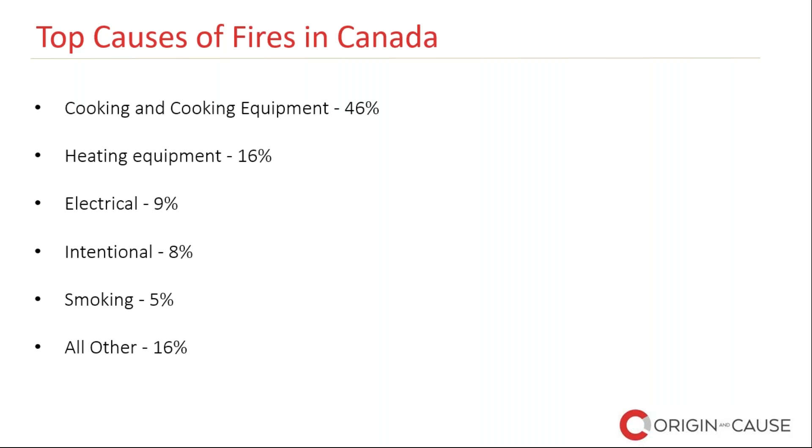Heating, throughout most of the country, is required most of the year. I'd say probably 7 to 8 months of the year we're requiring some sort of heating equipment, and the heating equipment is not confined to just heating the home. It's also heating water. There's a number of commercial applications that run into that. So yeah, it's 16% of the fires in Canada.

So the most common cause of heating equipment fires: very few heating equipment fires are due to malfunctions. Now, certain manufacturers have certain difficulties or challenges with some of their equipment, and they do malfunction. I'm not saying that they don't, but the majority of the ones that I have been involved with tend to deal with maintenance issues.

And when I talk about maintenance issues, I'm talking about regular cleaning and general maintenance. There are some service issues that come into that, but normally, maintaining the equipment would probably mitigate a lot of these fires.

Clearance to combustible issues normally involves either the installation of the equipment, or once the equipment has been installed, the user of the equipment putting combustibles too close to the equipment or the venting, which causes some of the fires. Venting of cracked vents and blocked vents normally has to do with carbon monoxide incidents, or incidents where the venting is too close to combustibles and you get cracked or blocked vents.

When you have a blocked vent, you can have the flames coming out the bottom, and we'll go into that a little bit later. The flame exits the bottom of the equipment and ignites any combustibles that would have been in the area around the equipment. So it's not just carbon monoxide incidents. It does have to do with the actual fire escaping the heat exchanger of the equipment and igniting combustibles. So almost all heating equipment fires are preventable if proper maintenance or installation procedures are followed.

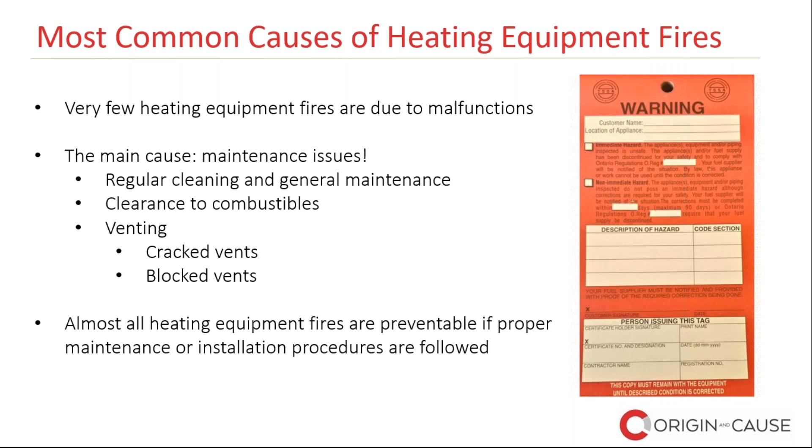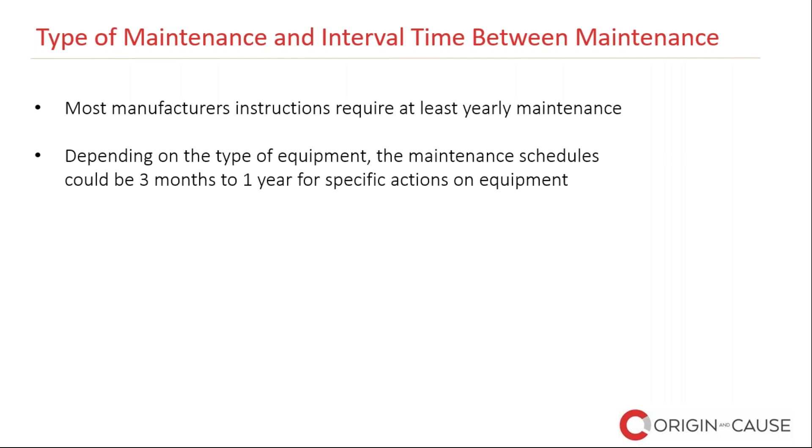The type of maintenance and interval between maintenance is normally manufacturer specific. Most manufacturers have at least a yearly maintenance schedule incorporated into the instructions that they leave with the equipment. It doesn't usually go past a year, and in some instances it can be down to 3 months. There are certain pieces of equipment where they give you month by month what you should be doing. That is not normal, and in most instances that would be very specific equipment, I would think. But when we're talking about maintenance, we're usually talking anywhere from 3 months to 1 year intervals.

So the type of maintenance and what is required, excuse me, sorry, they're included, but they're not limited to any of these. So I've just given you kind of a laundry list of what is required. You remove and clean burner and manifold. The manifold is the valves and the operating equipment that delivers the gas to the burner. A technician who's been doing this for a while can usually get those out fairly quickly. And cleaning those is essential when you're doing the maintenance.

You inspect the venting and check for blockages and perform venting check on atmospherically vented equipment. With atmospherically vented equipment, you're taking air from inside the building, and it is assisting with the venting of the equipment to outside air. On older equipment, you're normally going to see a draft hood on top of the equipment. Most water heaters installed now still have a draft hood or a draft diverter on the top, and they use interior air inside the home to make sure the venting goes up the chimney properly.

You clean the heat exchanger or boiler fins, tubes, or refractory. The heat exchanger is part of the system where the gas or the oil or whatever you're burning burns in. It normally requires a certain amount of cleaning, not a lot. If the equipment's been operating properly, you wouldn't really get too much on a heat exchanger. Boilers are different. Boilers require you to clean in between the fin tubes or refractory. Fin tube equipment is normally older. A lot of the equipment now is moving to high efficiency boiler systems, which still have fin tubes but normally require treated water going through them. So you still need to clean those out regularly. It's a little more labor intensive on high efficiency boilers.

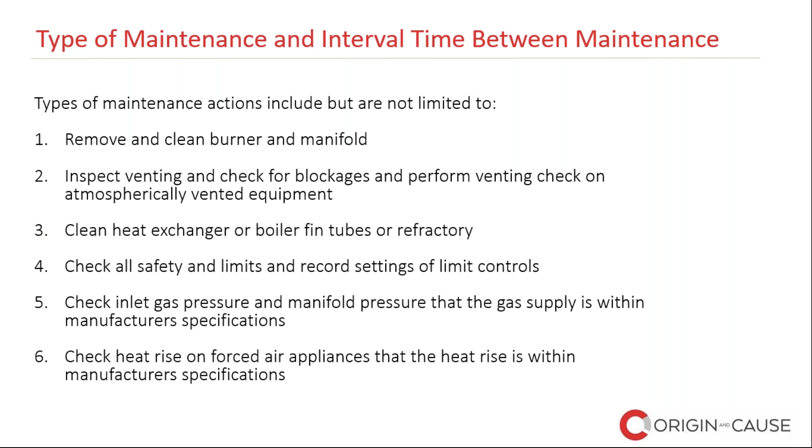There's a lot of information in that, and I would be asking for that type of information if an incident occurred. So I'd like to think that a lot of the service technicians or service companies are doing these things now. I'm not sure how that's working out, but I'd like to see it.

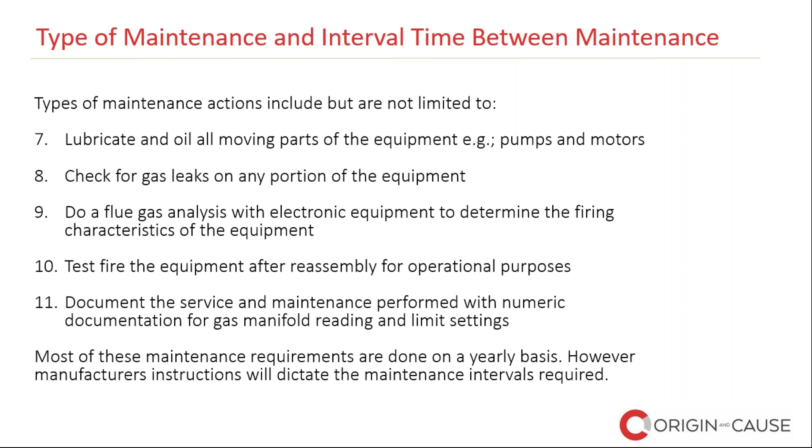So most of these maintenance requirements are done on a yearly basis. However, manufacturer's instructions will dictate the maintenance intervals required. So all of that being said, you need to have trained and competent service personnel doing the actual service and maintenance on the equipment.

The gas code is clear on this, that personnel performing installation, operation, and maintenance work shall be properly trained in such functions. Each jurisdiction will have its own requirements for this. This is a catch-all section in the gas code, which says that people have to be trained. It doesn't specifically say for jurisdictions, say Manitoba or Alberta or Ontario or BC or any other jurisdiction across Canada, what their requirement is.

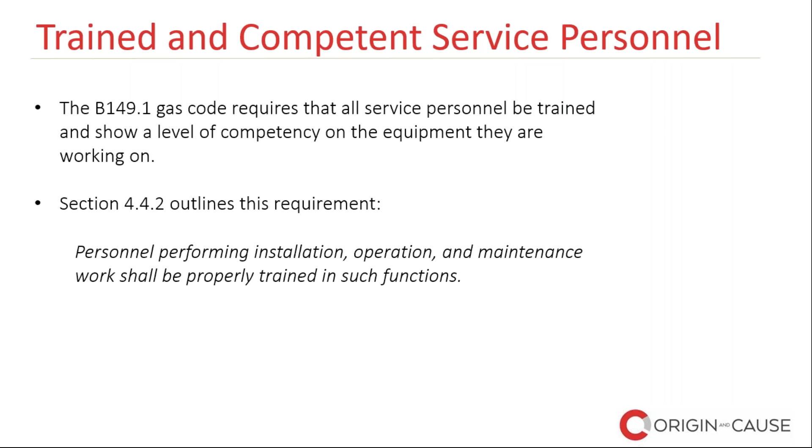Like I said, different jurisdictions require certification to conduct certain service and maintenance functions, and normally that is contingent upon having completed some sort of training program that is approved by provincial legislation, normally checked by a provincial regulator that the certification is adhered to.

On top of that, technicians should be familiar with equipment that they're working on. So a technician shouldn't just be going to the equipment for the first time he's seeing it and working on it. He should reference manufacturer's instructions and documentation, which would give him a better idea of the proper maintenance function intervals that are needed for that equipment. That is not normally done. I would encourage almost every technician to do that nowadays.

The equipment that's coming out now can be fairly challenging with maintenance and service. So every manufacturer has different requirements, and the technician should be familiar with the equipment prior to initiating service or maintenance on that equipment.

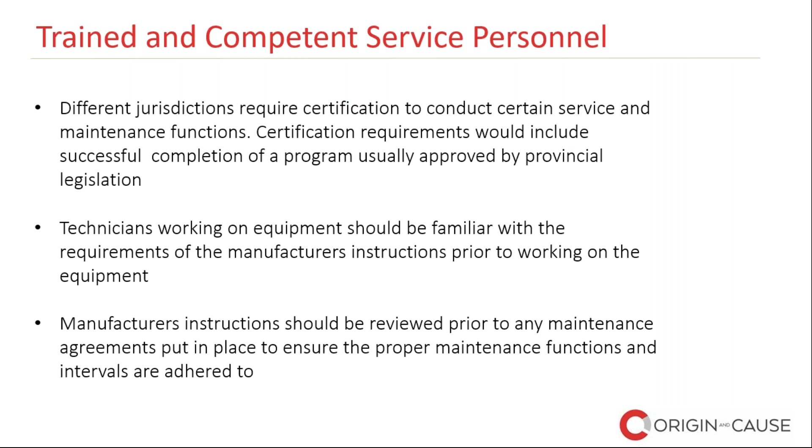So some of the key takeaways from this: manufacturer's instructions and maintenance requirements are vital to the proper maintenance of the equipment. Manufacturer's instructions should be reviewed and consulted before a maintenance program is implemented and prior to commencement of the maintenance. Certification and training is required by the B149.1 National Gas Code. Different jurisdictions have certification requirements for service and maintenance workers.

So each jurisdiction, like I said, will have basically a grading system. So people are allowed to work on equipment up to 400,000, and that's usually the number, the 400,000 number. And then it goes up from there. A lot of different jurisdictions have a lot of different categories for maintenance and service. So you'd have to check your individual areas of the country to make sure that they're working within the proper certification.

Documentation of the maintenance performed should be supplied to the owner of the equipment and kept on file with the maintenance provider. So this has to do with making sure that the owner has a copy of the maintenance that was done, and then that should be kept with the maintenance provider. Normally they're going to keep that around for a few years, probably 2 or 3 years anyways. I don't know how long they should keep it. That would be, I guess, specific to the service provider. So it's important that they have it on file though.

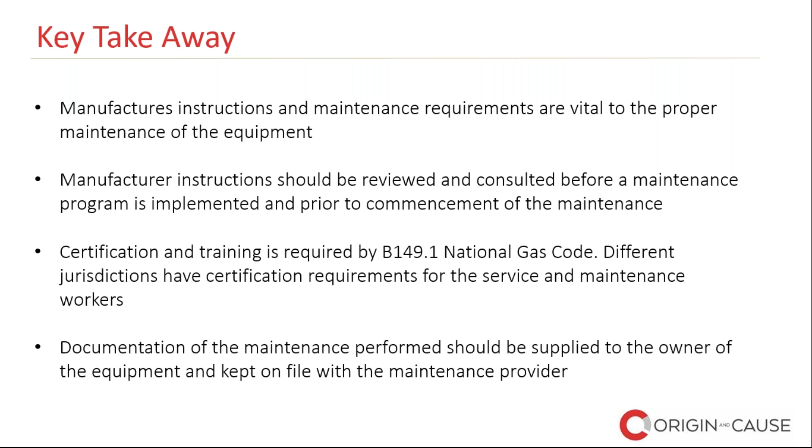So case study 1, this is a Super 8 motel in Manitoba. 46 people got sick with carbon monoxide poisoning. This was a couple years back in Manitoba. So this hit the mainstream media. I believe CNN and MSNBC and Fox News in the States actually picked this up as far as reporting on it.

So 52 people were evacuated from a Super 8 motel in Winnipeg. It was discovered that carbon monoxide was the problem. It was not a gas leak. So there's a difference between the two. A carbon monoxide poisoning, yes, it is a gas. However, it's not a natural gas leak. It's carbon monoxide which is burned in the equipment and has escaped the venting action of the equipment and leaked into the living space.

So long story short on this one, a lot of people went to the hospital, including a dog. Went to the hospital in Winnipeg. I guess animal services took care of that dog. But the important takeaway from this is that the equipment was not maintained properly. It had very little maintenance done to it, if any. When we pulled the top off of that piece of equipment, it was plugged up entirely, the boiler system. And that's the reason why, there were other issues as well as improper maintenance on the equipment.

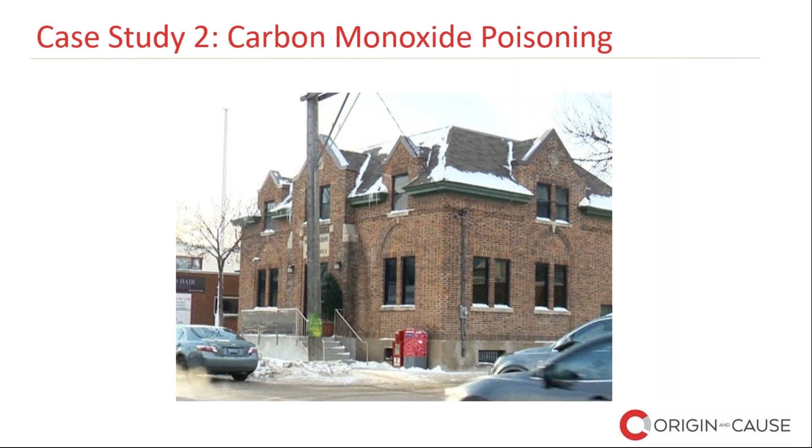So case study 2, this is also in Winnipeg. I'm not picking on Winnipeg, but it involved a gentleman who was working in a building. He actually owned the building, and he had contracted the company that was doing the maintenance on the equipment. They were having some issues with the equipment, and they had 3 service technicians in there within a period of a month to try and fix this problem.

There were people who were complaining about dizziness and headaches and all kinds of things going on within the building. This was not properly diagnosed or taken care of by the maintenance company, and it resulted in the gentleman who owned the building dying because of carbon monoxide poisoning. They initially thought it was a heart attack. After they ran some tests and the coroner got involved, they determined it was carbon monoxide that caused this.

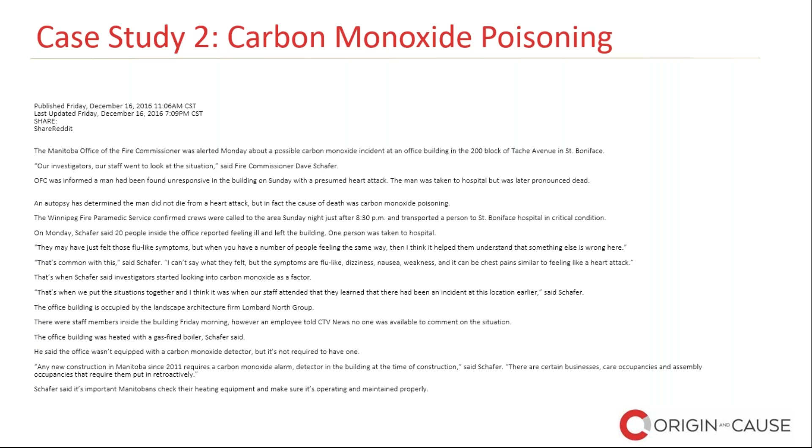It was caused by a blocked chimney on the roof of the building. So there were a number of other problems with the installation, but the main problem was that the person who was going to do the maintenance and service on this equipment did not properly check to make sure that the equipment was venting properly, and it resulted in carbon monoxide leaking into the space and caused the death of this gentleman. It's a very sad story.

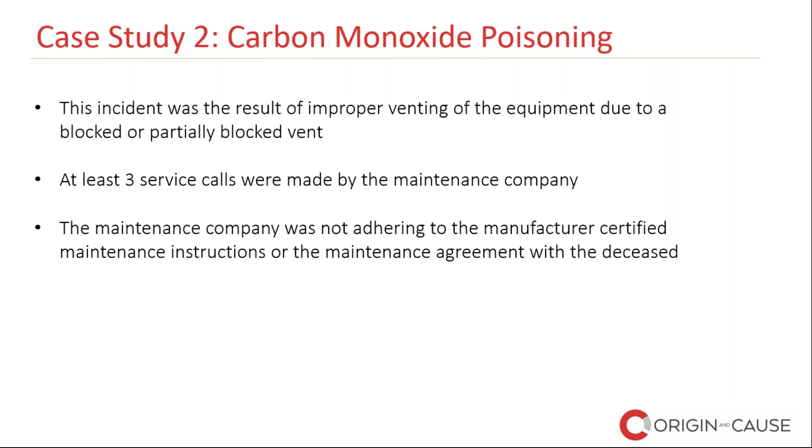Like I said, at least 3 service calls were made by the maintenance company to the building, and none of them picked up on it. So the maintenance also wasn't being performed according to the certified manufacturer's instructions or the maintenance agreement that was signed with the deceased. So the service company was on the hook for that. The widow took action with a wrongful death legal action. I wrote a 15 to 16 page report on this, and it was settled out of court.

I guess one of the key takeaways you should take from this is that if there is an incident involving a fire or carbon monoxide involving heating equipment, you should get a fuel expert involved immediately.

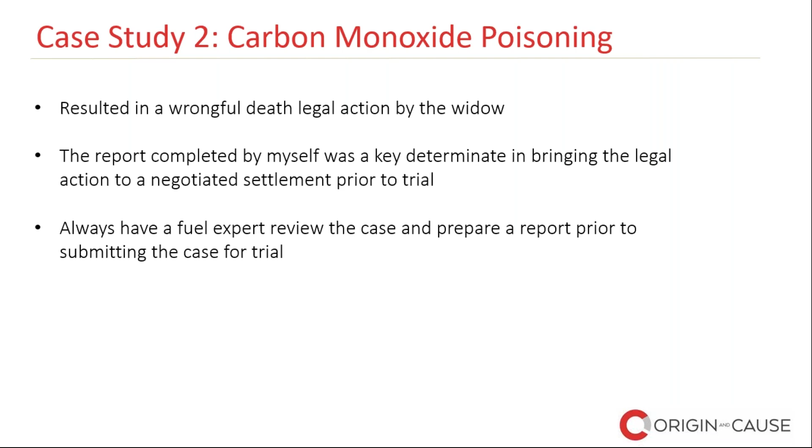It's easier to get things sorted out at the time that this happens, rather than down the road when you're going to have to piece everything together at the end. We were able to do that because it was documented very well by the fire commissioner's office in Manitoba. So we were able to get a bunch of information after the incident. So my takeaway to you on this is get a fuels expert involved immediately if you know that the equipment is going to be in question as to the cause of the fire or the incident.

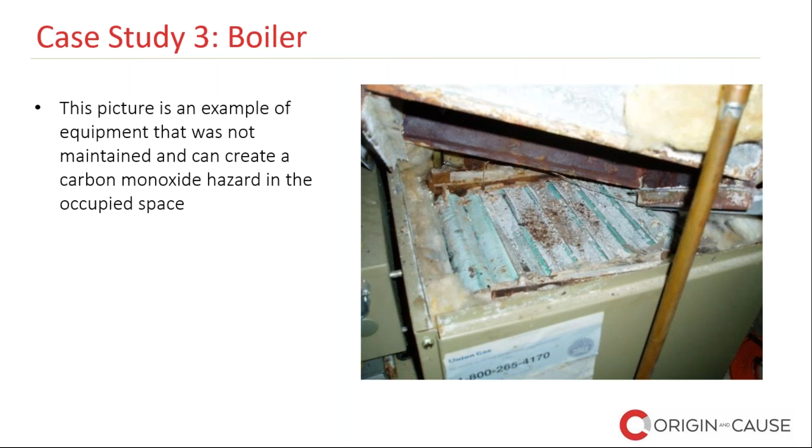So when fire is shooting out the bottom of the boiler, you have a blockage issue. Normally it's either a blockage in the boiler or it's a blockage in the vent. Now, if you have flame shooting out the bottom, you've got a carbon monoxide problem, but you also have an instance where you can ignite combustibles that could be around the boiler. When you hear insureds or people who were there saying, yeah, I saw fire shooting out the bottom of the boiler, you can pretty much be assured that there's a maintenance issue with that boiler. It's not due to malfunction of the boiler normally. It's normally due to maintenance.

So when you're taking these claims on, or you're investigating this, you need to ask, how old is the boiler? When is it serviced and how frequently? Have there been any repairs or maintenance done to the boiler lately? And the name of the person and the company that did the work, because we're going to be checking up to make sure that the person who did the work is properly trained in the functions of doing that. So that's one of the key takeaways that you'd want to have.

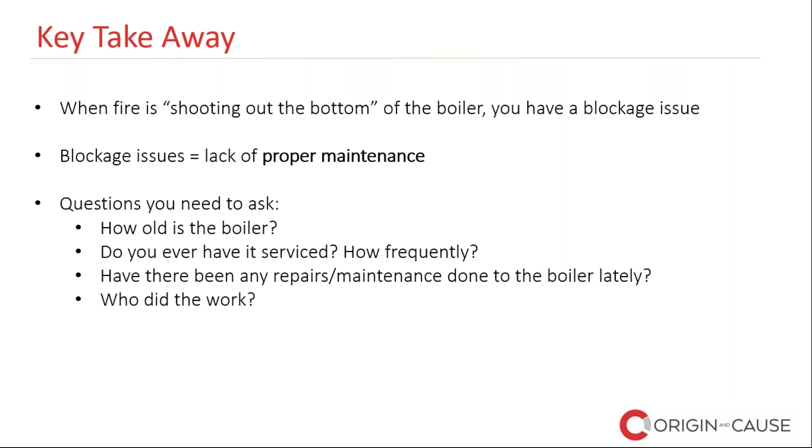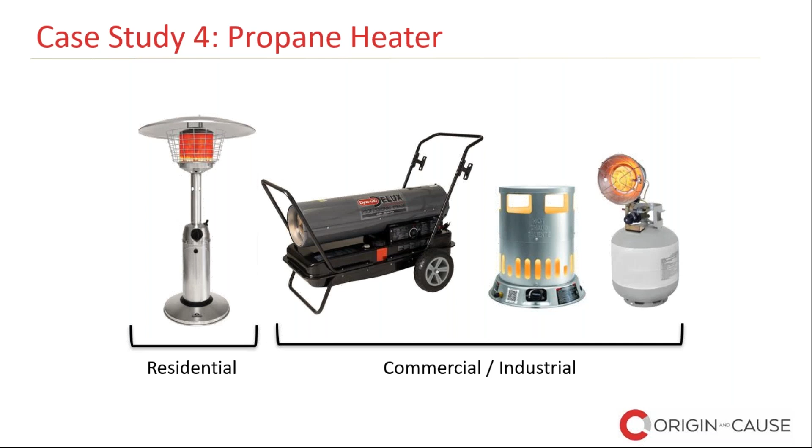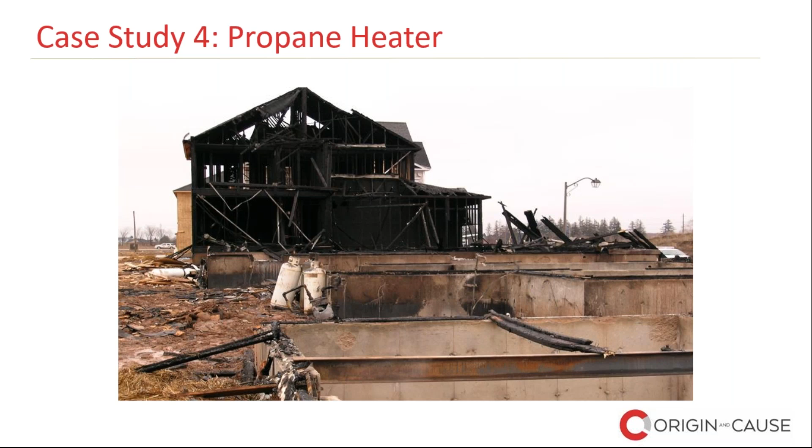So this is a building site where a builder was using propane to heat the homes that were under construction. It resulted in, I believe, 4 homes actually; 3 were totally devastated, and the 4th one in the background there, you may as well say they're going to knock that one down. So almost all of the homes were totally devastated from basically a propane heater that looked like that. The propane heater was on the construction site and put on top of straw.

I asked the builder before I went and looked in some of the other homes that he had under construction there, like, what were you doing with this heater? Was it in the basement? Nope, we usually put it on some sort of a non-combustible base, and the first home I walked into, I saw this.

So you could pretty much be assured that this is how they were operating the propane heaters on the site. Luckily, nobody was hurt, and it was just basically buildings that burned down, but it could have very easily turned into a situation where, if there's homes under construction in a residential community, you could affect people who have already moved in and are next to a home that's being constructed, and these heaters are in there being utilized in this way.

So I just point this out that people who do this need to be properly trained in how to put these in, and if they aren't, they would be liable for any of the damage that would come from one of these heaters being put on top of straw or not being utilized according to manufacturer's instructions.

So it's another thing that you have to keep in mind when you have a construction site where buildings have burned down. You should get a fuels guy involved, because there's probably going to be some sort of auxiliary heat that was needed to heat the buildings.

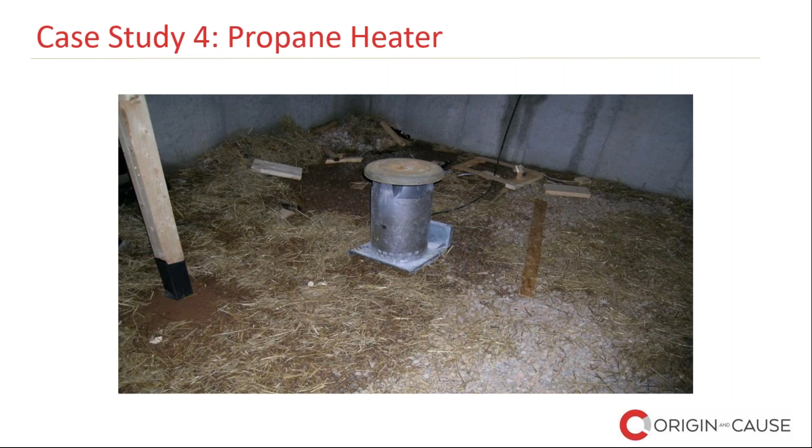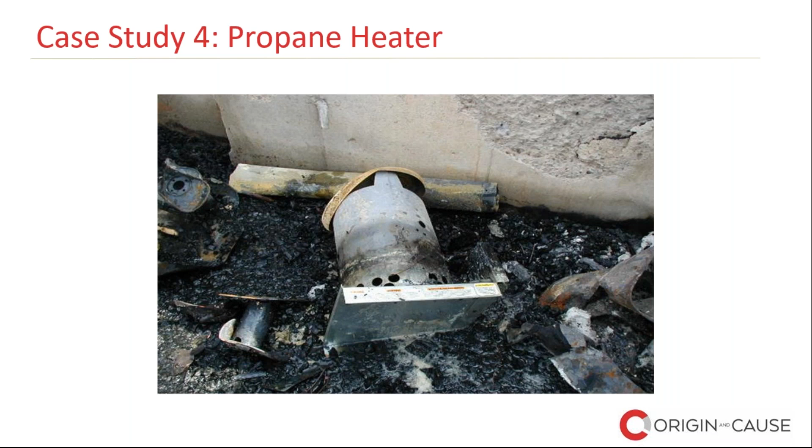That's the construction heater in question, and you see how it burnt the concrete on the side there. What I believe happened is that it ignited the straw. The straw melted the propane hose, and now you're getting basically cylinder pressure out of that hose ignited into the basement. So it wouldn't take too long for that house to go up, and it would take a great deal of heat to cause the damage to the concrete on the side there.

So the most common causes of propane heater fires are clearance to combustible issues and hose connections and lengths. The hose connections need to be proper for the piece of equipment that's being used. Torches are another issue with propane.

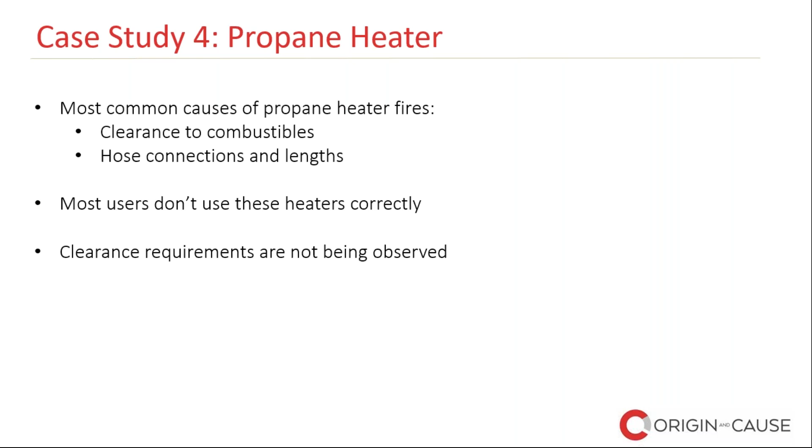A lot of builders or roofing companies use torches on flat roofs on the top of buildings. When that torch is in use, somebody needs to be there at all times. You can't just leave that torch going. So most of the time, the heaters aren't used correctly according to manufacturer's instructions, and clearance requirements are not being observed in a lot of these cases where the propane heater has caused the fire.

So, like I said, I've been to a number of fires like this. These are totally preventable. It just has to do with keeping things away from the bottom of the water heater. It's all about clearance to combustibles. Just to make you aware, I'm sure there's a lot of adjusters out there that have had claims similar to this.

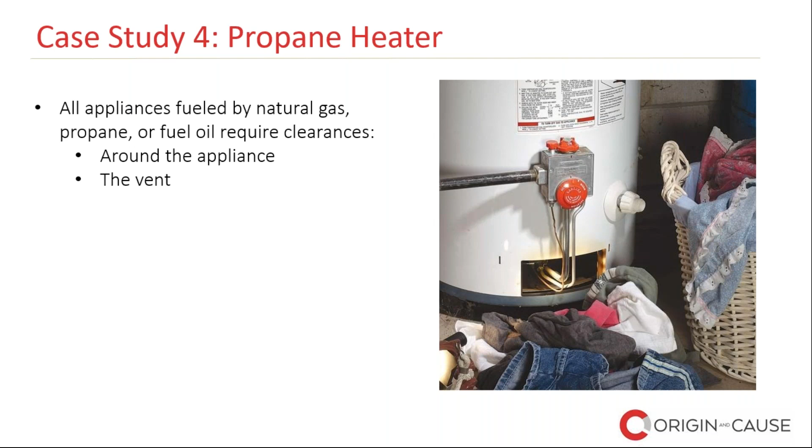Some of the key takeaways: these incidents happen frequently in residential claims involving renovations. Be sure to secure the evidence, so any of the heaters that would have been involved, the propane cylinder, and the hose, if it's available. Normally the hose gets burnt pretty badly, but don't let the contractors or the insureds move or discard anything until an expert attends the scene. It's harder to put things back the way they were if somebody's in there messing with them.

Now, if the firefighter is going in there and there's a situation where they're beating down the fire and they have to remove the propane cylinders, I get it. I understand that. That's totally understandable. But after the fact, everything should be left the way it was until we get there. It's best if you probably fence it off and don't let anybody get back in until an expert gets there.

In construction-related claims, some of the questions you should ask: what was their method of heating the construction site? What kind of heaters were being utilized? Was the fuel natural gas or propane? Because a lot of the times the natural gas is in already, and they can use natural gas heaters inside these buildings. So you just have to be certain that it was either natural gas or propane.

And this is important. Who was hooking them up? Like, who's doing the placement of the heaters and who hooked them up? When I do an investigation like this, I'm gonna want to talk to that person to see how knowledgeable they are in doing this, and whether they know anything about what the maintenance or the clearance requirements are of that piece of equipment.

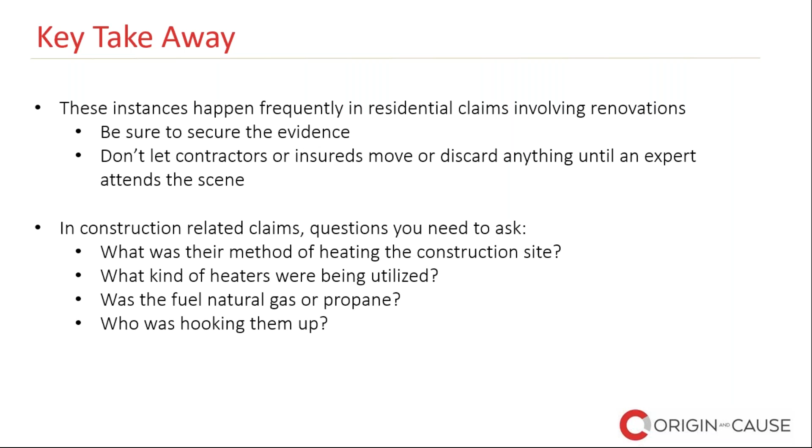I would say stop storing propane cylinders inside the home. This is a pet peeve of mine. I've actually gone into friends' homes and seen cylinders inside their garage, and basically taken the cylinder on my own out back or out into a shed area, and told them, look, please keep them out here,

because I don't know if there's any firefighters here right now today, but this is probably one of the scariest things for a firefighter when they're beating down a fire and they go in and they see cylinders inside a home. These things can become rockets very quickly. Not only that, but the cylinders can leak from time to time, and now you've got a propane leak inside your home. Never a good situation.

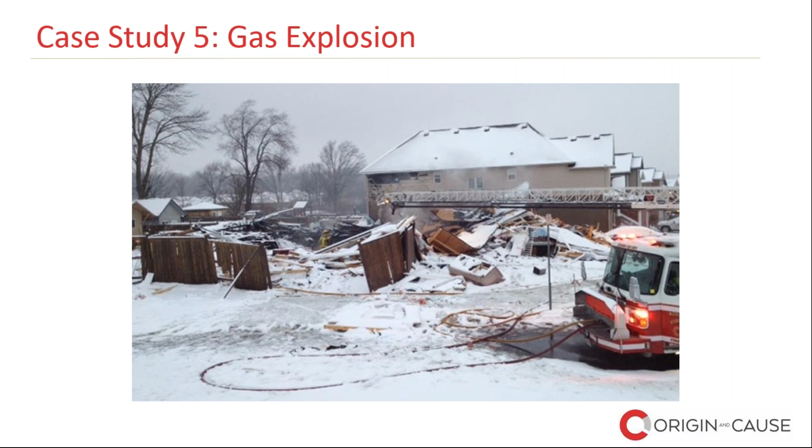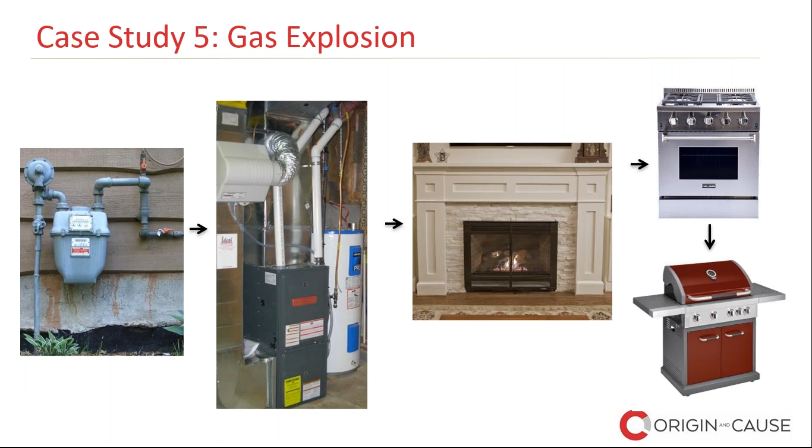So when we're talking about a gas explosion, all of these things are gonna have to be eliminated as a possible source of the explosion. You're not always able to do it very easily, but this is why gas explosions take so much time: you have to eliminate everything that's on gas in that home, and like I said, it's not always easy to do. So causes of gas explosions would be faulty workmanship, contractor leaving leaks in piping, or improper installations.

Underground leaks from utility piping. It's important, when you're talking with the insured after an explosion like this, to ask if there was any kind of maintenance work being done on the street or on adjacent streets to anything underground. They may have inadvertently hit a natural gas line, and the natural gas leaks underground and into homes, and that's where you can get a leak happening and a gas explosion from that.

So misuse of fuel, storage and use of propane cylinders. If you're using a barbecue inside the home, and you've got propane cylinders operating propane-fired equipment inside the home, that's not a good situation and should never happen. So the wrong type of fuel for a type of equipment. People tend to think that it's a gas appliance, so it can use propane or natural gas. Nope, you have to use either one or the other.

There are dual fuel equipment out there. Normally, it requires a technician to come in and change the orifices and the spring tension on the valves. So it's not something that you can just easily flip over on your own. It's something that should be done by a technician. And normally the equipment is labeled after it's done that this equipment has been switched over from propane to natural gas or vice versa. The other gas explosion types are self-inflicted, suicide attempts or criminal activity where people have tried to blow up a home for either the insurance money or they've got a beef with the person who lives there.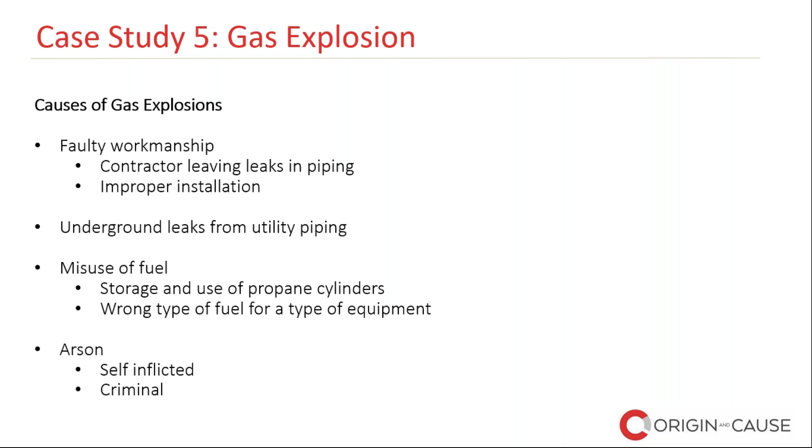So just a bit on gas explosion investigations. These investigations are incredibly complex because of how many gas appliances and fixtures there are in a typical home or building. I've mentioned that before. So each source of fuel must be ruled out or ruled in as a source of fuel causing the explosion. So in addition to the fuel appliances, we need to consider compressed gas containers or aerosols that could be the source of the explosion.

It's not normally the case, but you can have an aerosol can or a gas container inside the home that doesn't have anything to do with natural gas or propane that has BLEVEd or caused an explosion of some kind. I've only had a few of those, but it does happen. Normally, these are victims of the fire or the explosion, and you can hear them popping after the fire gets going. But they still need to be ruled in or ruled out as a possible source of the explosion.

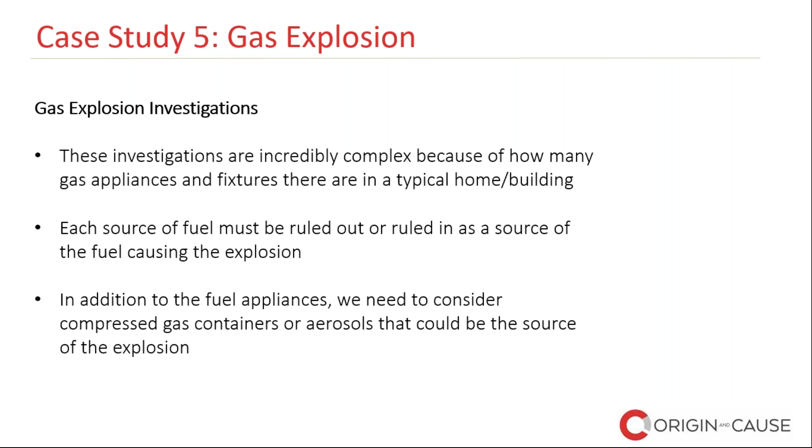So some of the key takeaways are: if you receive a gas fire claim, you should call a forensic investigator immediately. Regardless of the subrogation opportunities, you need to document the physical evidence or the lack of evidence to protect yourself from a liability standpoint. Questions you should ask: has there been any servicing done lately to the gas meter? Has there been any construction done on the street lately? Who was in the home? And have there been fatalities?

The fatalities, I suppose, you're going to know immediately. But you're going to have a coroner involved and all the rest of it when you have a fatality. So these types of investigations sometimes don't get handed over to the insurance company immediately. There's usually a 3 or 4 day wait while the fire department does their investigation, and perhaps the coroner or the police are doing something as well. So you're going to be involved in making sure the scene is policed properly so that it's not open to the public or anybody coming in there.

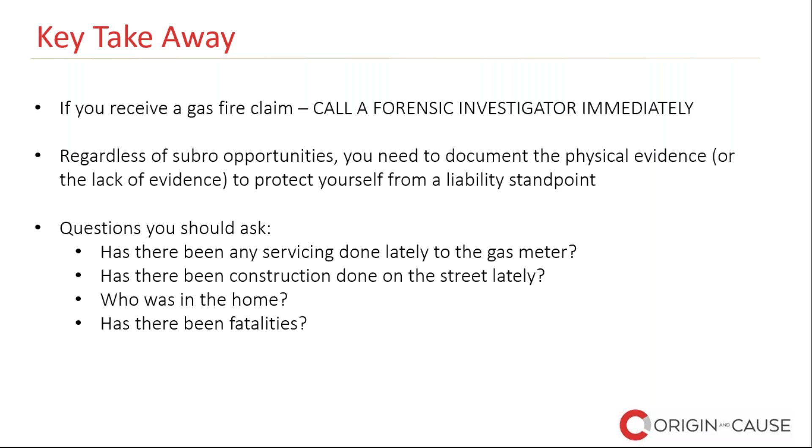If you get an explosion, you should call a forensic investigator immediately. Even if that forensic investigator is not a gas or propane or explosion expert, you should call one immediately. They can usually get you in touch with somebody who is. So the maintenance of gas equipment can save lives.

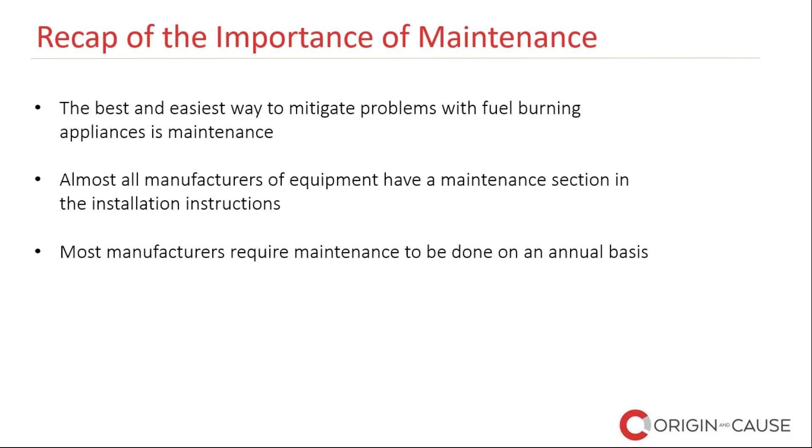Just a recap of the importance of maintenance. The best and easiest way to mitigate problems with fuel burning appliances is maintenance. Almost all manufacturers of equipment have a maintenance section in the installation instructions, and most manufacturers require maintenance to be done on an annual basis. It's not normally going past a year. So every year somebody should be coming in and taking a look at gas equipment, furnaces, water heaters, fireplaces; anything that runs on a hydrocarbon fuel should be maintained, usually on an annual basis.

So I'll leave you with this. There was a Woodstock family of 4 that was killed. This was back in, I guess, late 2010, I think, or 2011. Although this fireplace did not start a fire, it managed to kill a family of 4 in Woodstock. The carbon monoxide filled the home and overcame all family members. This resulted in the requirement for CO detectors in the home due to a private member's bill in the legislature. The uncle of the woman who died in this pushed this to basically call attention to carbon monoxide and carbon monoxide detectors being installed in homes.

The interesting thing is if this fireplace, and I'll show you a picture of it in just a second, had caused a fire, the family probably would have survived. They would have smelled something. The problem is that the fireplace was running basically all night and was producing CO at a level of pretty close to 400 to 500 parts per million in the basement alone, just a minute after we had fired it up afterwards. I actually had to have police detectives go in with carbon monoxide detectors and with SCBA gear to do this test. And it got to about 400 or 500 parts per million in about a minute.

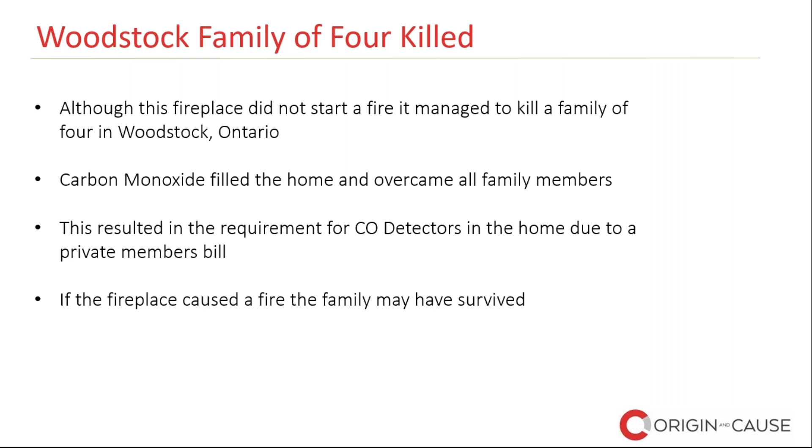Everybody was up in the night because they were puking. That's a part of a carbon monoxide incident, you get vomiting. So the mother had puke buckets by everybody's bed. She initially didn't know what was going on, but then she figured it out and tried to get to the door and didn't make it. They found her body right by the front door. So even though she knew at the end that this was the problem, the carbon monoxide was just too much in the home, and it overcame her.

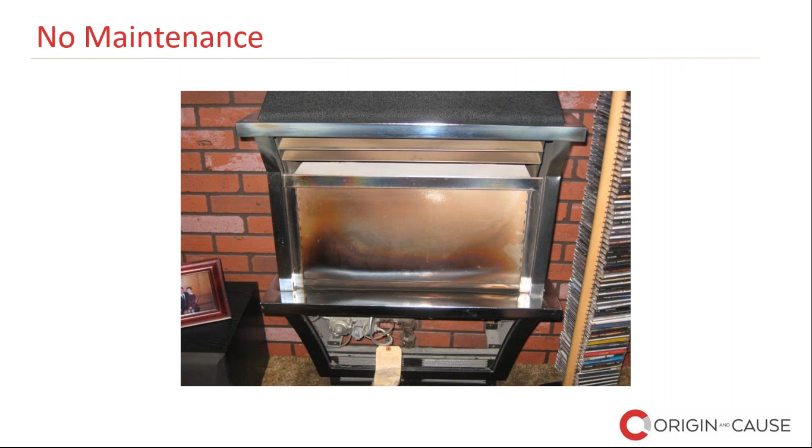So this was a direct result of no maintenance. If there had been a fire here, this family would still be around. If they had maintenance done on the equipment, this probably wouldn't have happened. So if I can leave you with anything today, please maintain your equipment and take your propane cylinders outside.